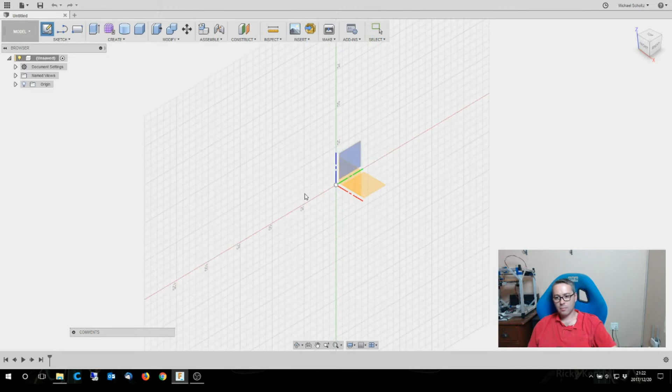I'm going to start with a sketch, and I'm going to select the horizontal plane. The first thing I'm going to do is draw a circle, and I'm going to select the center diameter circle. I'm going to start in the middle, and I'm going to move out 28 millimeters. Let me zoom in so you can see a little bit better.

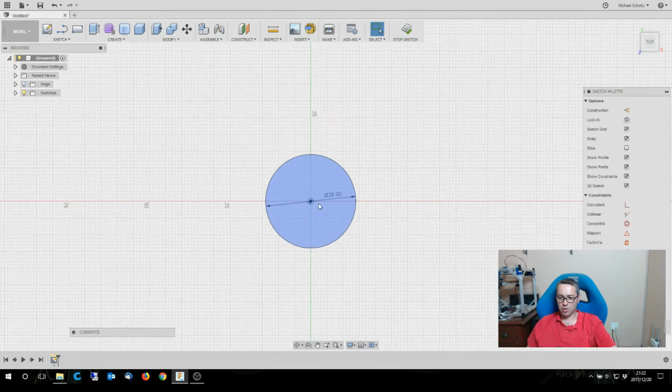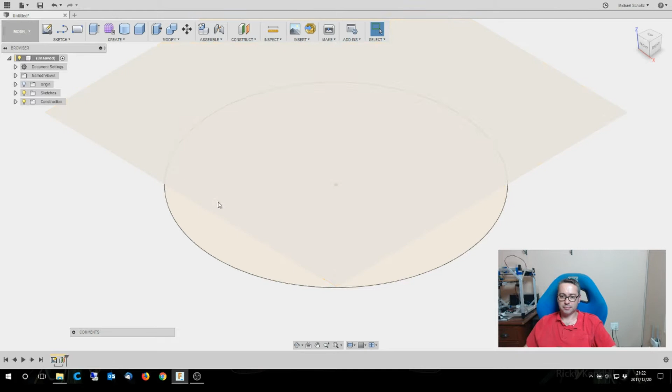I'm then going to stop the sketch, move over, and then I am going to select offset plane. So construct offset plane. From this plane, I'm going to move up 7 millimeters. Select that plane, and I'm going to start a new sketch.

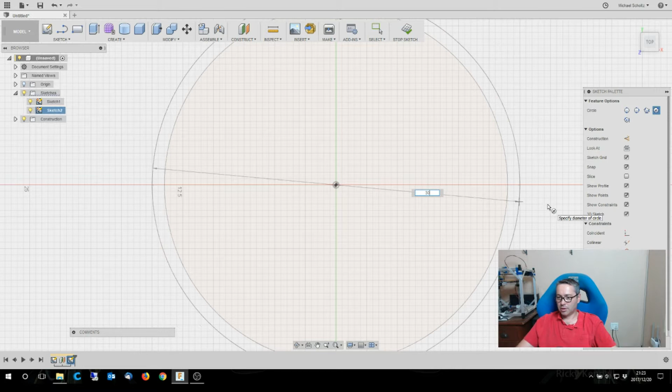I'm going to make sure that it's this new sketch. Yes, it is. And on that plane, I'm going to draw another center diameter circle. 30. And there you can see. I'm going to stop that sketch.

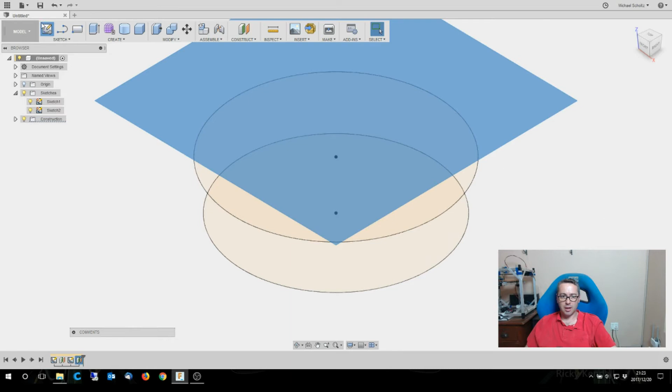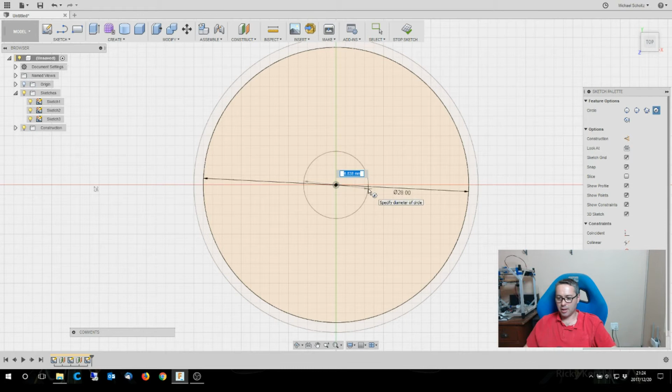Select that plane, construct the offset plane again, move up another 7, and draw a new sketch on that. Again, center diameter circle, 28, done. I'm going to draw one last circle, and the reason for this will be apparent later. 5, and done. Stop sketching. Alright.

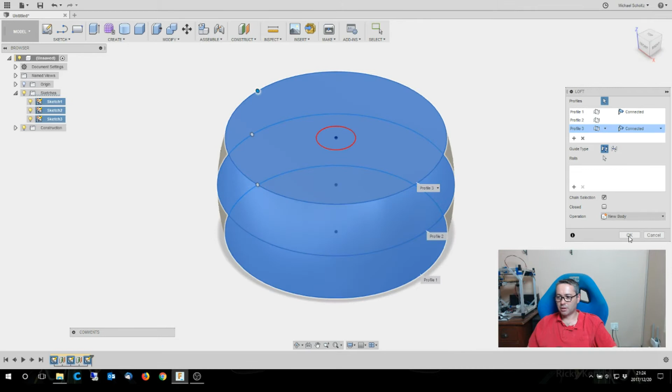After this, we are going to use the loft function, and I'm going to select profiles: this one, that one, and that one. And if you look at it from the front, that's going to create that rounding on the wheel. I'm going to say OK, and there we're done.

I'm going to turn the sketch back on again. I'm going to select the middle. I'm going to right click, press pull, take that, drag it all the way down. Okay, there's a hole through the middle, and that is the basics of our wheel. Turn the sketch back off again.

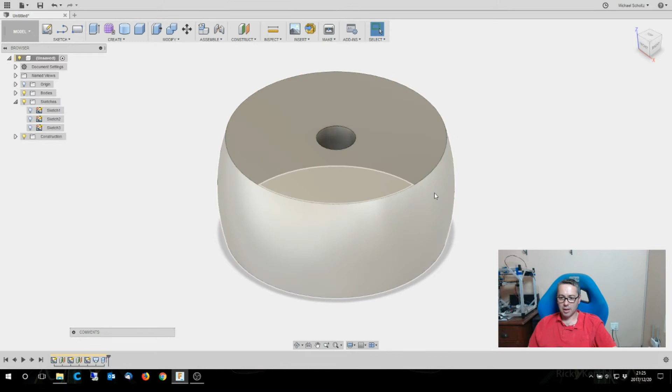Now the last thing I'm going to do, because it's round on the edges, not sharp, I'm going to select one of the edges. I'm going to right click, press pull, and I'm going to fillet that 3 millimeters. I'm going to then use a control key, select the bottom edge, and select, and when you let go, it's going to then fillet both. I'm going to say OK on that.

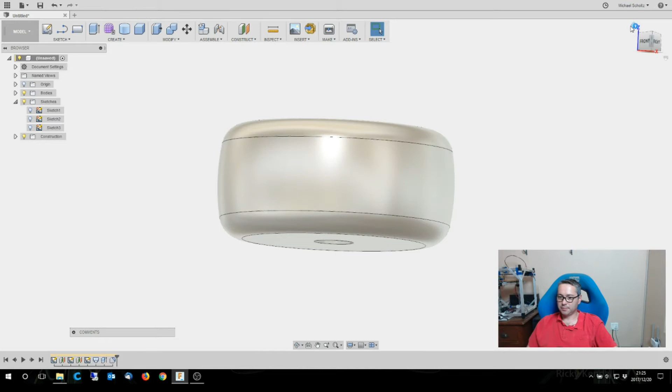And I want that middle to be in a little bit as well. We'll bring that into 1. Hold down the control key. You can see there's a hidden edge. You can select it, and we look at it. It's going to put a slight fillet on there as well. And that's the first wheel done.

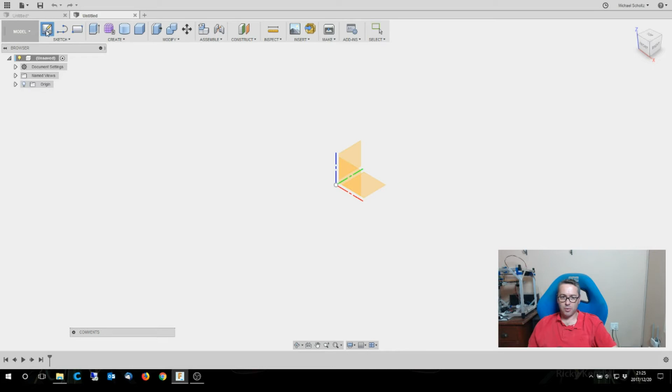Alright, so moving on to the second one, slightly different approach. But again, we're going to start with a sketch. This time, I'm going to select a vertical plane. I'm going to move in.

Twelve and a half, which means if that's 25, that's 20, 15, 10, 5. So that's 2, 4, 6, 8, 10. 12 and a half. So that would be 2.5, 5, 10, 12 and a half. So that's what I'm looking for. I want that line over there.

So I'm going to start a sketch. I'm going to start with a line, and I'm going to start right there. From there, I'm going to move out to 11 and a half. Is it 11 and a half?

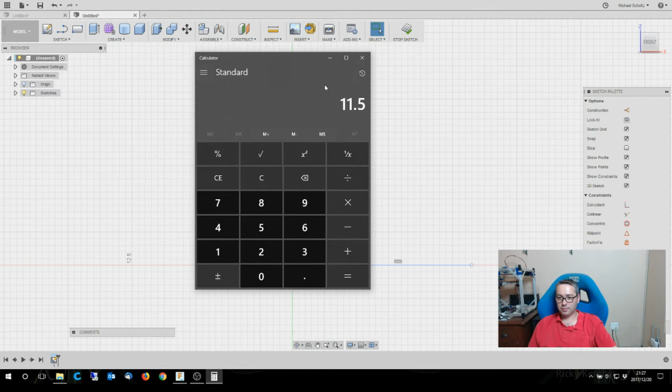Let's just pull up a calculator quickly and make sure. So we want that outer diameter to be 28, but now we're only drawing half of that, so we need to divide that by 2, which gives us 14, and then we need to subtract 2.5 from that: 11 and a half. Okay,

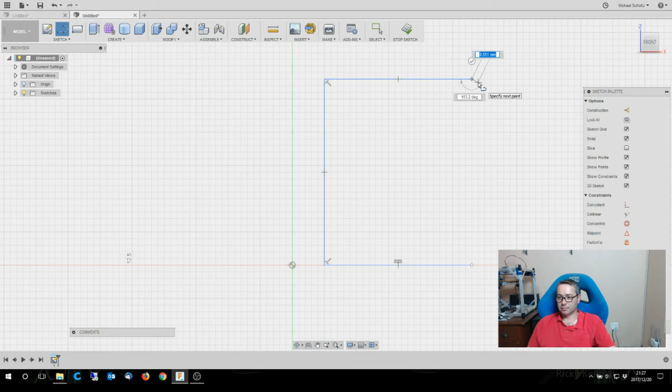So that is correct. I'm going to draw 2 more lines, one from here up to 14 and over to 11 and a half there. I'm going to escape to end that. And that's in line there. And 2 millimeters is out there.

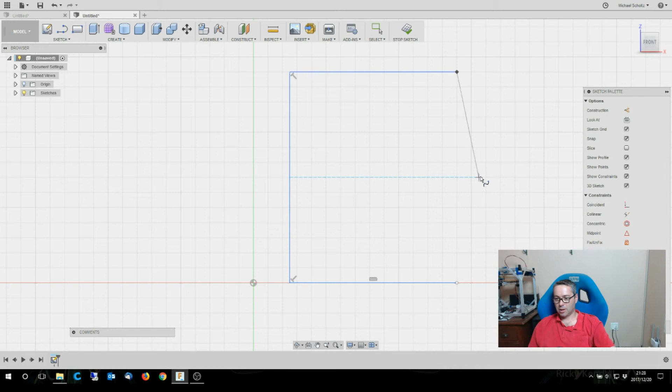Sketch. I'm going to use a spline. From there, I'm going to move out. That is, there we go. 1, 2, click. Down to there, click. Enter. And you will see how that's gone filled in color, which means that it is a closed shape. If it doesn't do that, you've done something wrong.

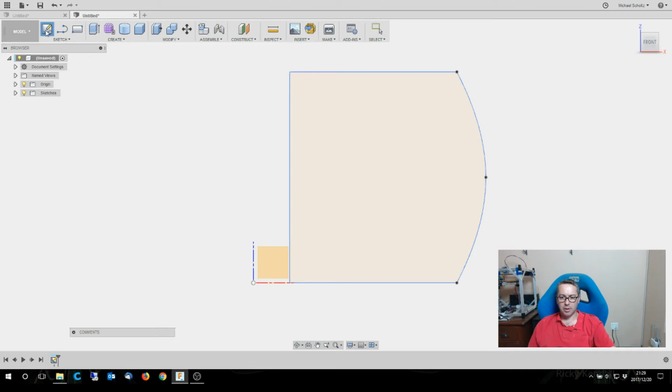I'm going to turn the origin back on. I'm going to sketch again, and this time I'm going to draw a line just from there up.

Sorry, I don't want that one. Just delete that. Stop the sketch.

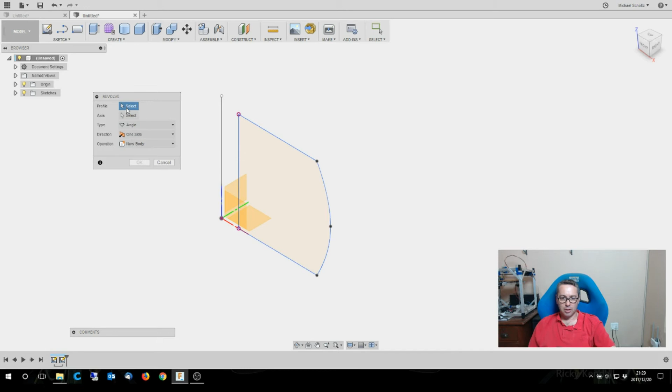Look at it from the front. So there is essentially the outline of the wheel that we want. I'm now going to create it. I'm going to go to Revolve, select the profile, which is this one, select the axis, and that's why we drew that additional line.

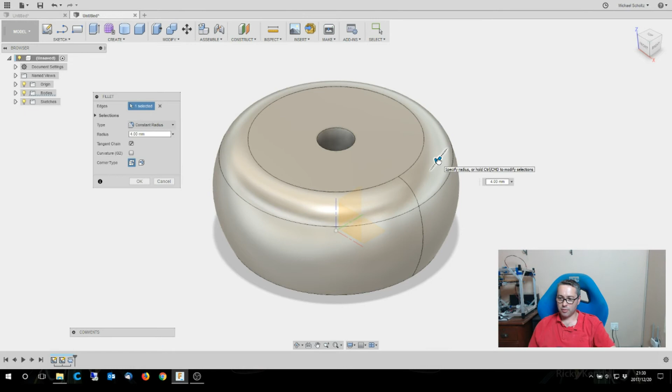It's going to revolve all the way around and create that wheel. And as you can see, it's gone and drawn the whole thing again. We're going to click there, right click, press pull. That fillet was 4 millimeters. Hold down the control key, select the bottom edge.

It does that, and then the inside chamfer we wanted 1 millimeter, and at the bottom as well. And there you go.

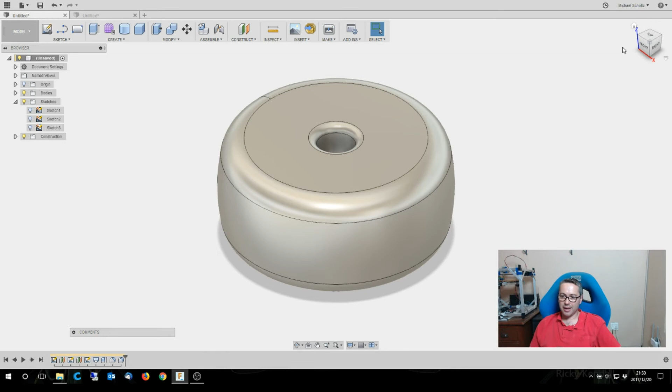Right, so it's a slightly different way to draw it, and if I go back and forwards between them, you'll also see that because of the spline, it actually does create a slightly different arc. So it's not exactly the same, very, very similar, and essentially they'll do the same job. But you can see how drawing something slightly different is going to have a different effect on how it ends up. Okay, so that does take a little bit of skill and a little bit of know-how.

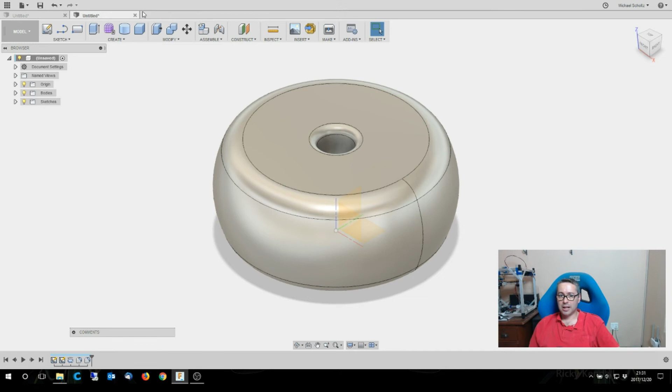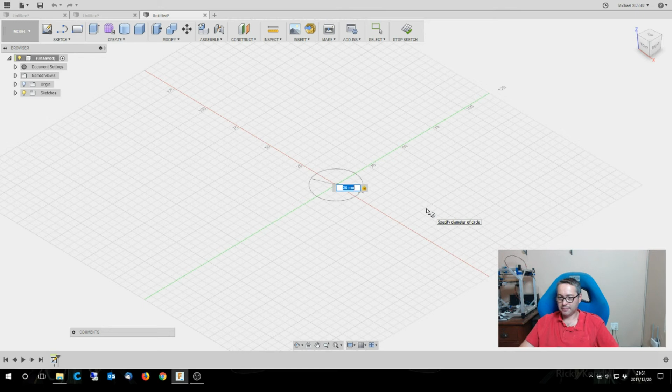I'm going to show you a third way to draw this. For years, this is the way I used to draw things. It's quick, it's easy, and in my opinion, still one of the easiest ways to draw. I'm going to start off with a cylinder. I'm going to put it on that plane, and I'm going to make it 30 millimeters in diameter, and I'm going to make it 14 millimeters high.

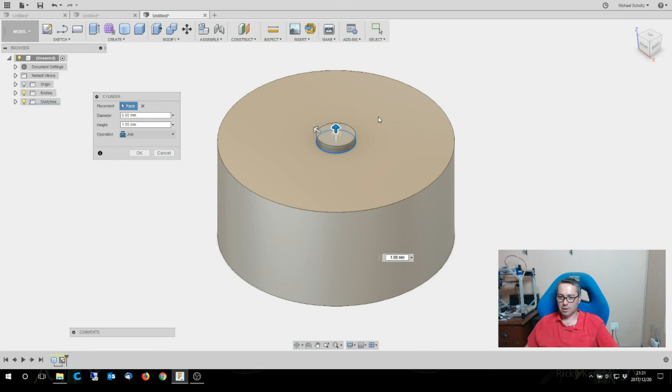Zoom into it. I'm then going to create another one. Make sure I do it in the middle. In the middle, 5. Done. I'm then going to push it all the way through to cut the hole in.

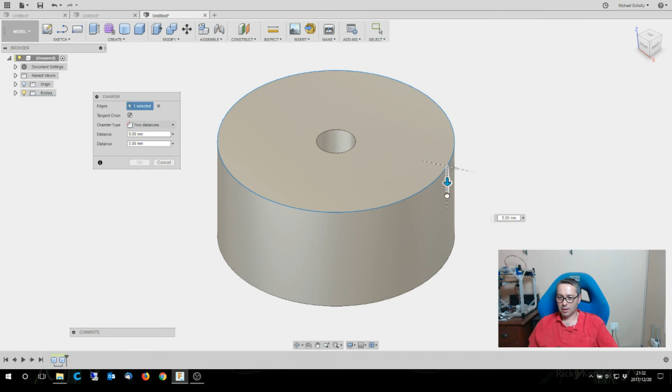I'm going to take the top edge and modify that, and create a chamfer. Instead of equal distance, I'm going to tell it to do 2 distances, and I want the first one to come in 2 millimeters there. Actually, you know what, I'll do 1 millimeter in there, and let's do 4 down. Let's see what that looks like.

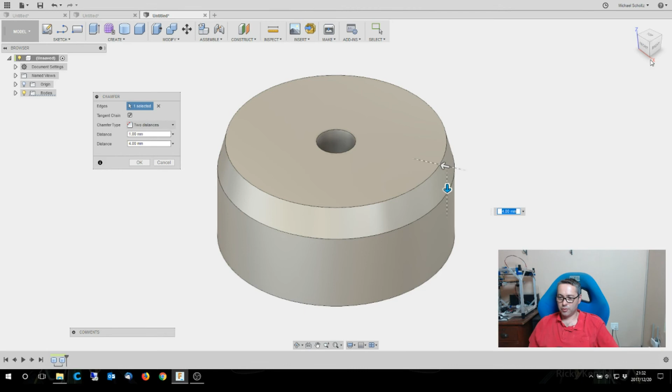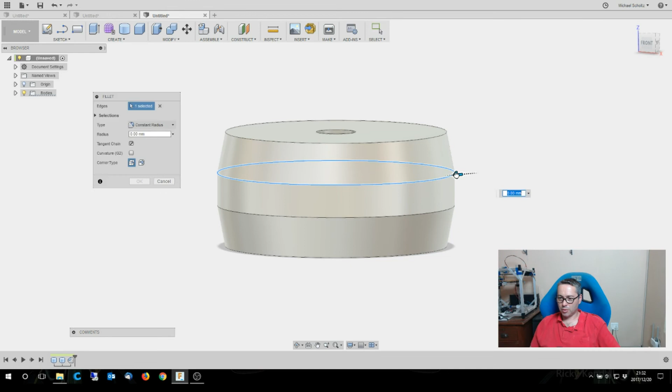And I'm going to take that edge and do the same thing, and let's put it all the way there. I'm then going to take that edge, press pull, to create that. And that'll give me the rounding.

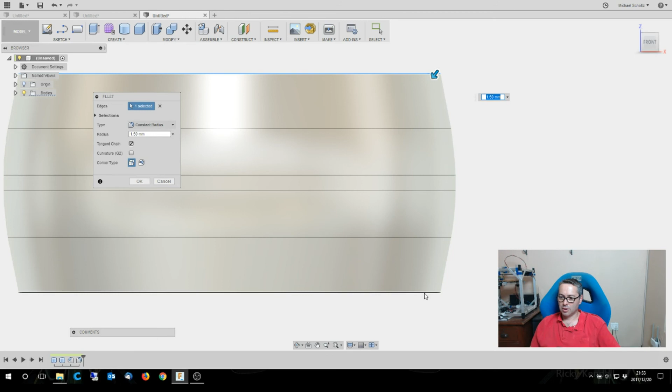And the top edge, I want to do the same, in a little bit more there, and again, a little bit different. Inside, press pull, take the bottom up, done.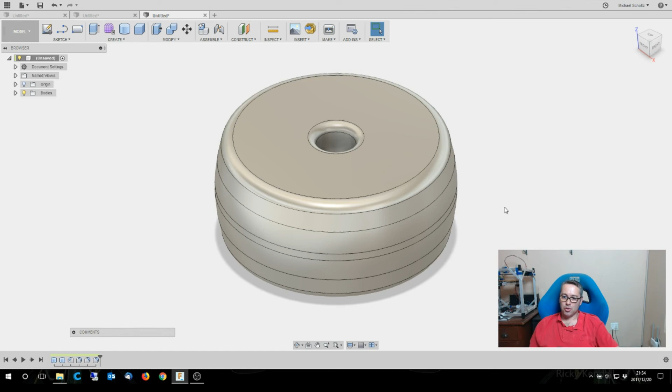And this is by far the fastest way to draw, in my opinion. Again, slightly different result, as you can see, different from how the other two look. But not a bad result, and worthwhile to draw something quick and easy. This, like I said, is for years how I used to draw things to get it done. It is quick, and there really isn't any fuss about it.

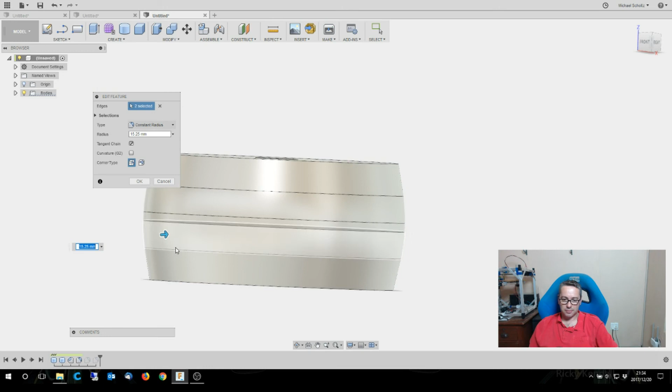I still like drawing like this. What's nice about this edge here gives you a nice flat edge, and something that's 3D printed, it's quite nice to have a larger surface area on here. Seeing as this is Fusion, you can obviously go back to it, and you can go and change that.

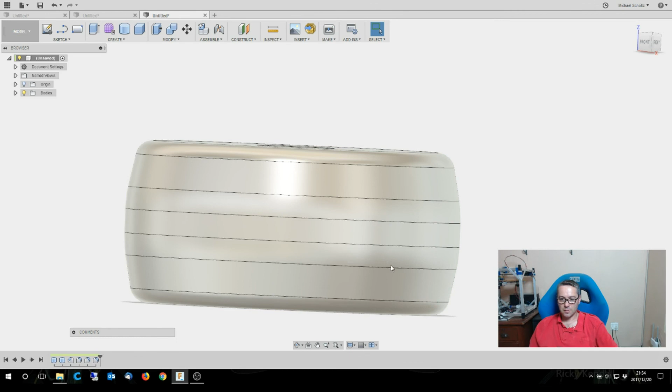So less of an edge, more of a flat area on there, but a bit of a sharper transition. And again, you can go and fiddle with that if you want. Maybe I'll leave it there. All right, so there you go. Let me get back to this one.

3 ways to draw essentially the same thing, each with their own benefits and advantages, each a little bit different. What I wanted to show you though is that there's no real correct way that you have to draw things. By thinking a little differently, you can go and draw the same thing in whichever way appeals to you the most. And that's what I wanted to show you today. I'm going to take that out, stick it on a printer, replace the wheel, and then go and fit it back on the gate.

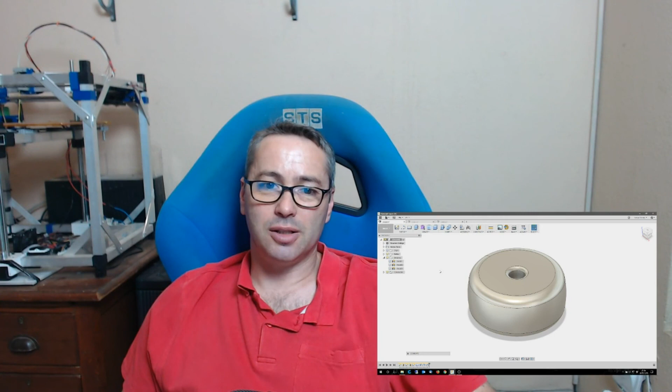So there you have it. 3 different ways to draw the same thing, and they all have slight differences, but in the end, whatever's the easiest for you is the best way to draw it. It also just goes to show that there's no one way to do something, and you need to use different things depending on what you want to achieve. Some things are going to be easier in one way, other things are going to be easier another way. By knowing all of those and having all those tools available to you, it means that you can apply whatever appeals to you or is the easiest or the best way to do it to what you want to do on a given day.